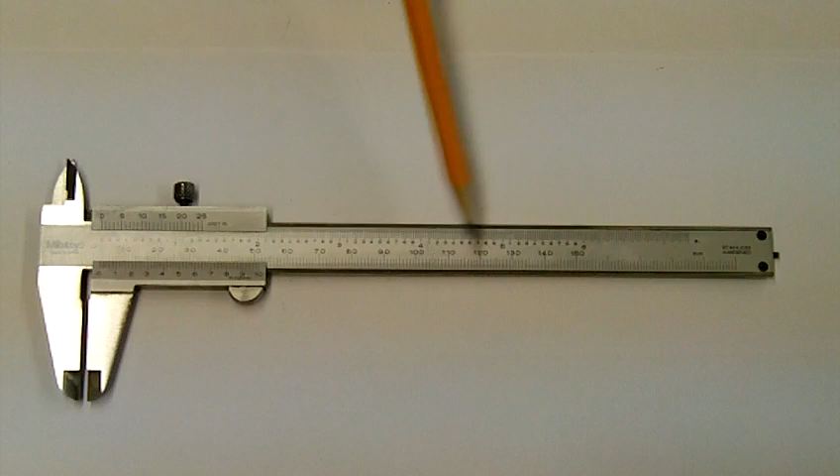Let's have a look at the parts of the vernier caliper. This tool is very common to the machine shop. This particular one will measure from 0 inches to 6 inches, or from 0 millimeters to 150 millimeters.

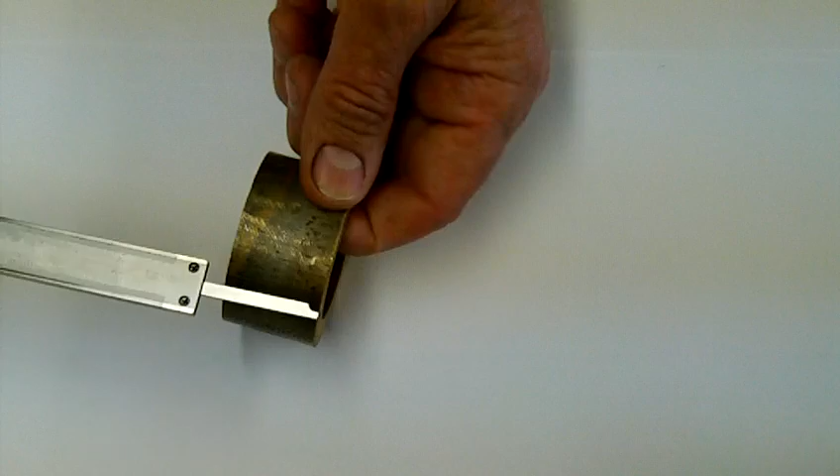It has 2 scales on it. It is meant to measure the outside of a part, the inside of a part, or if you look down at this end, we actually have a depth rod. We can measure the depth of a part with this particular one here. So it's a very handy tool to have, and most machinists will have probably a couple of these in their toolbox. Let's have a look at the parts of it.

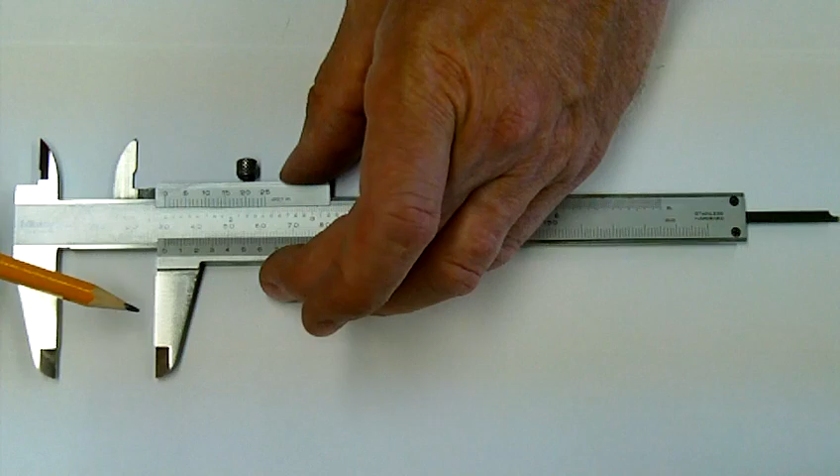What I have is several different moving parts on this vernier caliper. These 2 jaws are the outside jaws, meant to do outside measurements. These 2 are the inside jaws, meant to do the inside measuring. And again, we have a depth rod that comes out the back of it, meant to do depth measuring.

You will notice that one jaw moves and the other jaw stays stationary. This is called the movable jaw. This is called the stationary jaw.

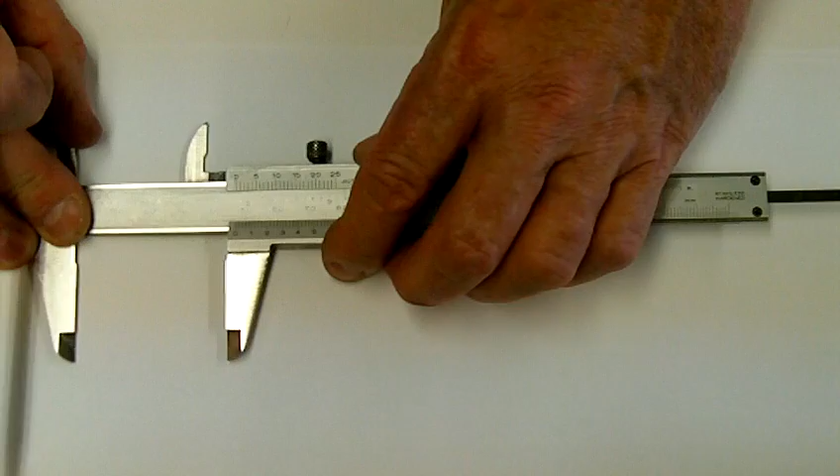As indicated, we actually have a couple of scales on this tool. We have the main scale on the solid jaw and the beam of this vernier caliper. This one here has inches on the top and metric on the bottom.

If we move down to the movable scale, you will notice there is a short scale that actually moves. This one here is an inch scale, and down below it is a metric scale. This is called the vernier scale, and we'll have a look in another video how to read it.

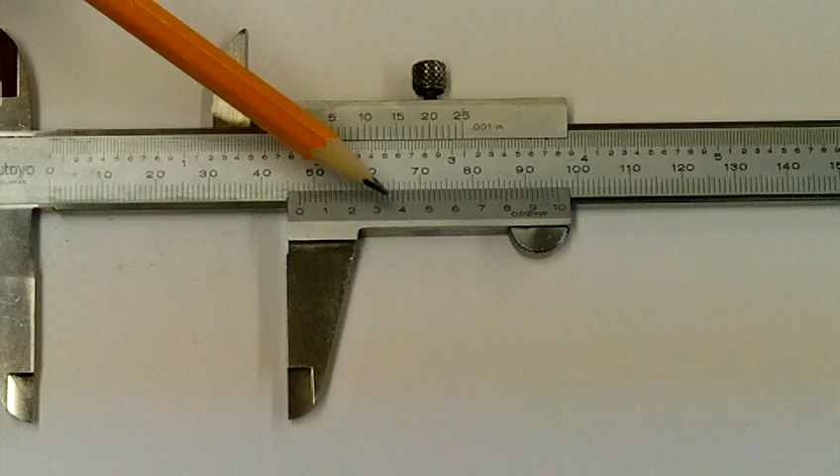We also have a lock nut, so if I turn this nut and lock it, the jaw doesn't move anymore, so there's no chance of getting an error in the reading. Some vernier calipers will actually have a little lever here. If I depress that lever, it'll allow it to slide rather than the nut.

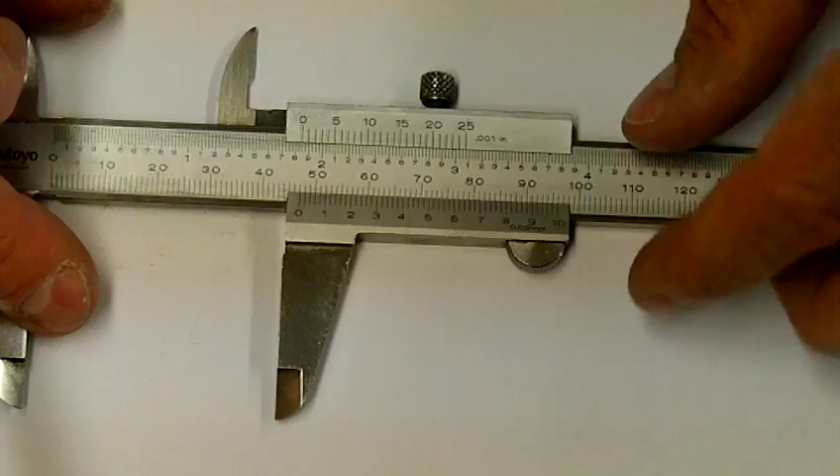So again, if we have a look at the parts of the vernier caliper, we have the solid jaw, the main scale on the beam, the movable jaw, which also holds the vernier scale. We have the inside measuring jaws, one solid, one movable, the locking nut in this particular one, and the depth rod out the back. We will have a scale on the main beam.

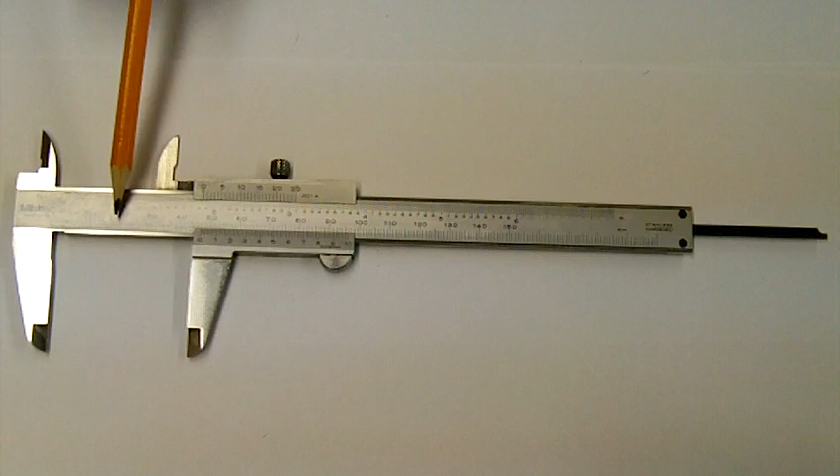This one has 2 scales, inch and metric, and then we have a sliding scale or a vernier scale, again inch and metric. This is a 6-inch vernier caliper, or 150 millimeter vernier caliper, which is the extent it will read to.